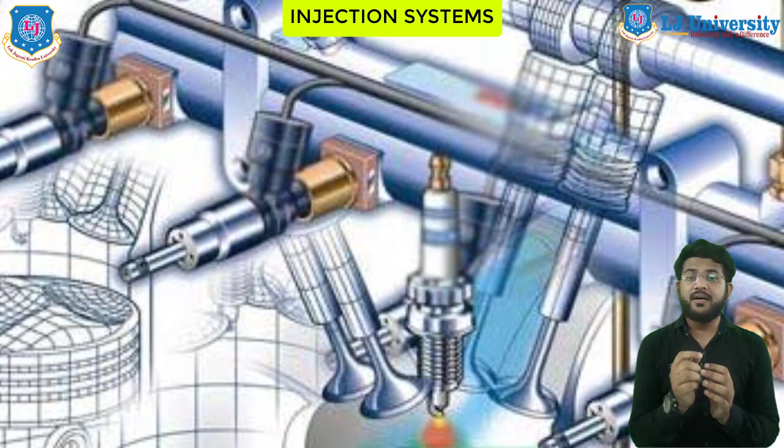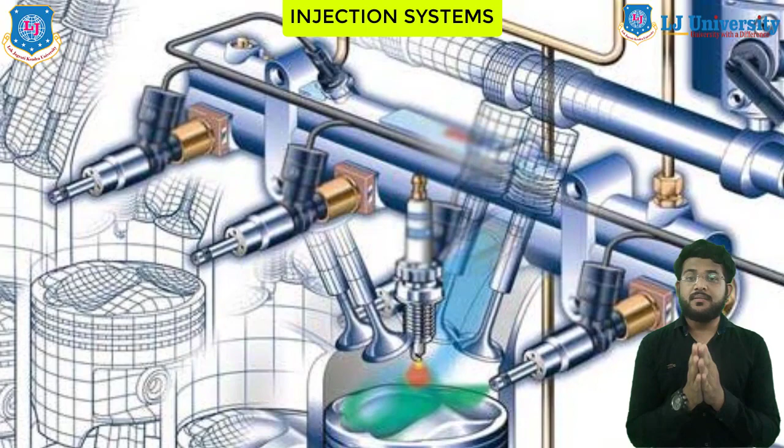The objective of the electronic fuel injection system is to regulate and optimize the fuel-air ratio entering a vehicle's engine. Fuel injection has recently become the main fuel delivery system used in automotive petrol engines. We will discuss the basic electronic fuel injection system, that is EFI, and other types of injection used in automotive in very brief.

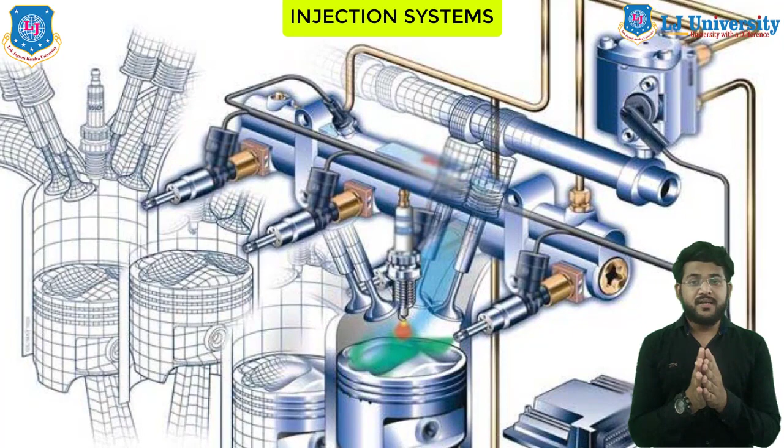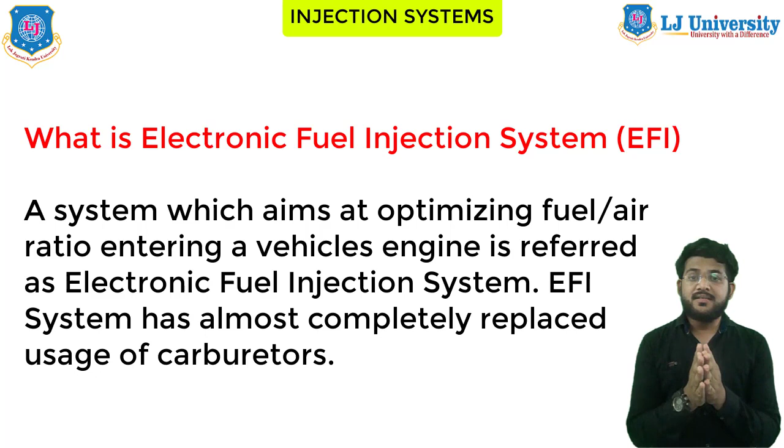First, let's start with what is electronic fuel injection system, that is EFI. A system which aims at optimizing the fuel-air ratio entering a vehicle's engine is referred to as an electronic fuel injection system. So the EFI system has almost completely replaced the usage of carburetors.

You all know how carburetors work - it has a venturi and the fuel comes from the jets. Carburetors are good for performance, but due to their vague nature, they can't make great horsepower, get solid gas mileage, and pass the emission test.

Along with the same tune, they also had many mechanical parts that could become jammed over a period of time. This means they were more maintenance intensive, with carburetor rebuild often being part of the routine maintenance schedule - you need to service it every time.

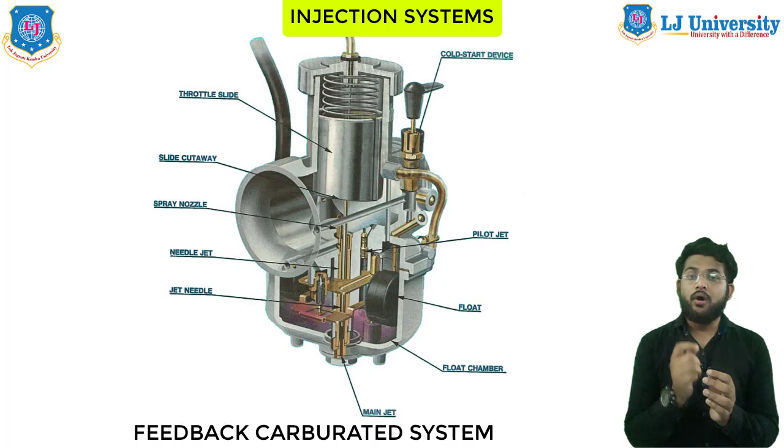So OEMs looked into EFI to solve their complex emission problems. The initial EFI was mostly just processor-controlled carburetors attached to an oxygen sensor and throttle position sensor, all wired to an electronic control unit called ECU. You all know how the ECU works.

The electronic fuel injection system consists of electronic components and sensors. It has to be kept clean and well calibrated to boost engine strength and efficiency and to cut down gas consumption, so that we can overcome the disadvantages of the carburetor.

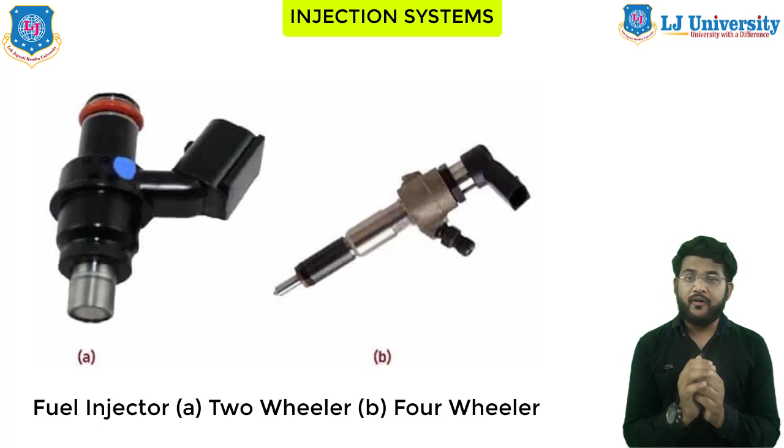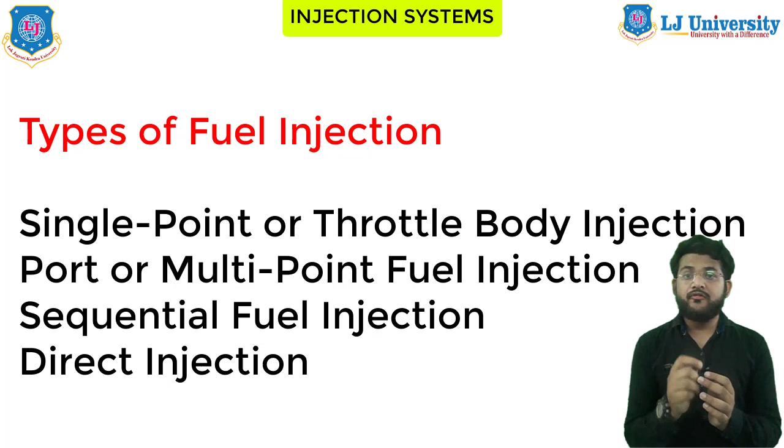To understand the concept better, we have to first understand different types of fuel injection systems. The fuel injection types used in newer or recent cars are: first, single point or throttle body injection; second, multi-port or multi-point fuel injection; third, sequential fuel injection; and fourth, direct injection. These are the main four types of injection actually used right now in cars. Let's discuss all of them one by one.

First is single point, or you can say throttle body injection. The first and simplest kind of fuel injection was the single point injection. Here the carburetor is replaced by one or two fuel injector nozzles in the throttle body, which is the throat of the engine's air intake manifold - the inlet manifold.

Single point injection was a stepping stone to the more complex multi-point system for some manufacturers. They are economical and easier to service.

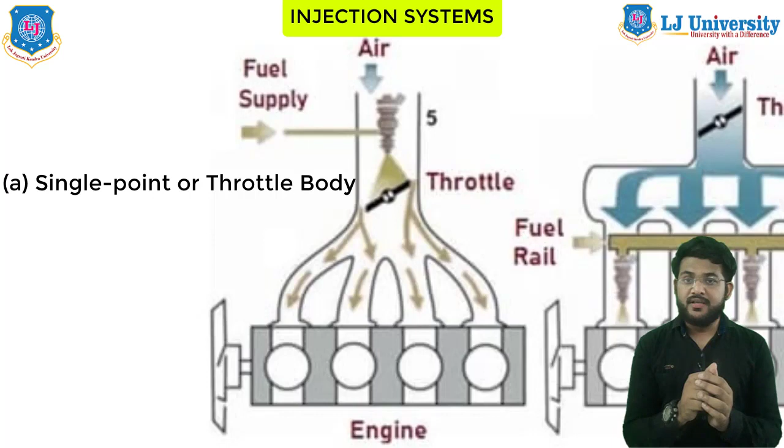Next is port injection, or multi-point fuel injection, that is MPFI. In MPFI, a separate injector nozzle is devoted to each cylinder right outside the intake port, due to which the system is also called a port injection system. When the fuel vapor is shot close to the intake port, it makes sure that the fuel is drawn completely into the cylinder.

The major benefit is that MPFI meters the fuel more precisely than the throttle body design does, so it is better at achieving the desired fuel-air ratio and improving all related aspects.

It also nearly eliminates the possibility of fuel condensing or getting collected in the intake manifold. Now, the TBI system - that is throttle body injection - and carburetors are designed in such a way that the intake manifold conducts the engine's heat, which is the measure used to vaporize the liquid fuel.

It is not necessary on engines equipped with MPFI, where the intake manifold can be made out of lighter weight material, even plastic or fiber.

So the MPFI system results in increased fuel economy due to reduced weight. Standard metal intake manifolds have to be positioned on top of the engine to conduct heat, but with MPFI it can be positioned more creatively, granting the engineers design flexibility. This makes it easier to design MPFI engines since it reduces the design constraints of the intake manifold and heat portion.

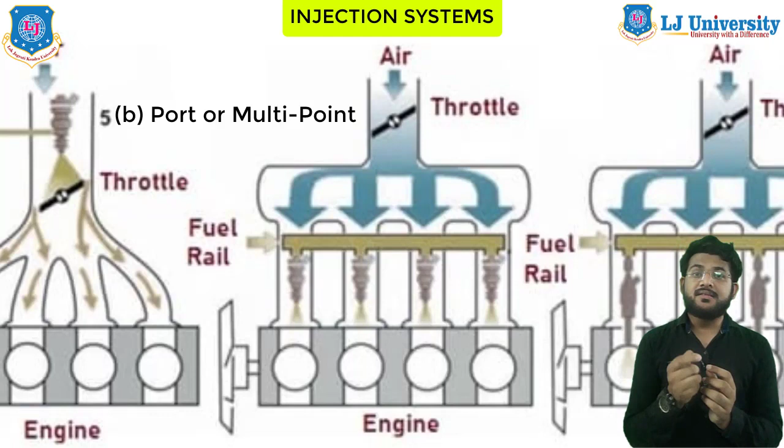Next is sequential fuel injection, also known as sequential port fuel injection (SPFI) or timed injection. It's a type of multi-port injection. Although MPFI has multiple injectors, they all spray fuel at the same time or in groups as per firing order. This may cause fuel to hang around in a port for as long as 150 milliseconds during engine idle. It may not seem like much, but it's a significant enough limitation that engineers addressed it.

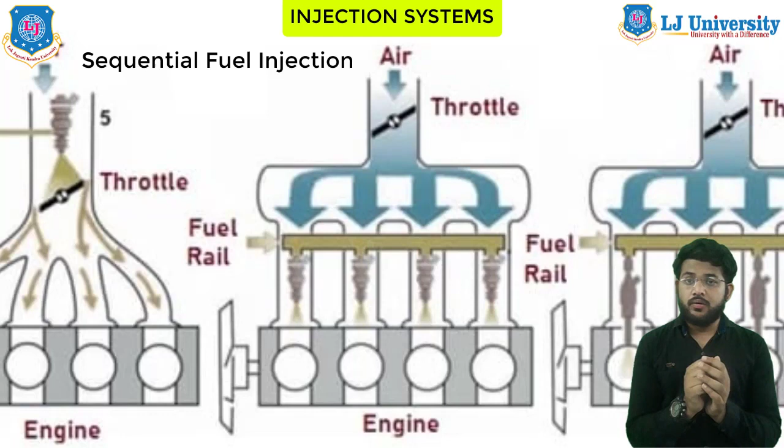Sequential fuel injection triggers every injector nozzle separately. They are timed like the spark plug and spray fuel immediately before or as their intake valve opens. Although it seems like a minor step, the efficiency and emission improvements come in exceptionally small doses. So this was all about the sequential injection system.

Next is direct injection, the last one. Direct injection injects fuel straight into the combustion chamber, past the valve. This system is common in diesel engines and is beginning to appear in gasoline engine designs also, sometimes called GDI, or gasoline direct injection system.

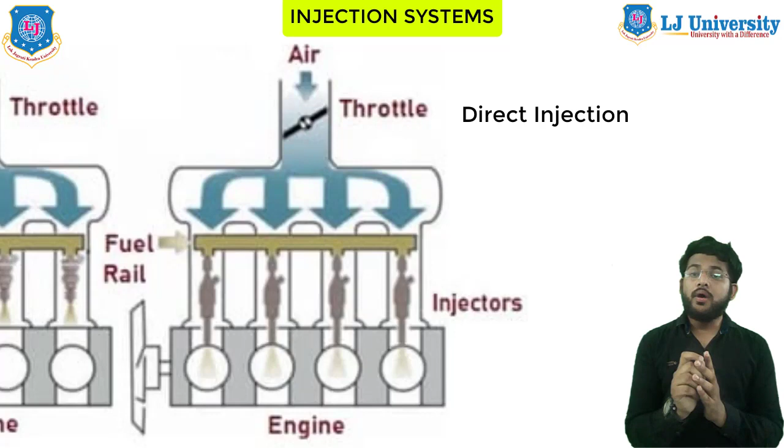Fuel proportioning is still more accurate than in other injection systems. The direct injection system grants the engineer an additional variable to precisely influence how combustion occurs in the cylinders. This discipline of engine design scrutinizes how the fuel-air mixture swirls in the cylinders and how the explosion travels from the ignition point. Direct injection can be used in low emission, lean burn engines.

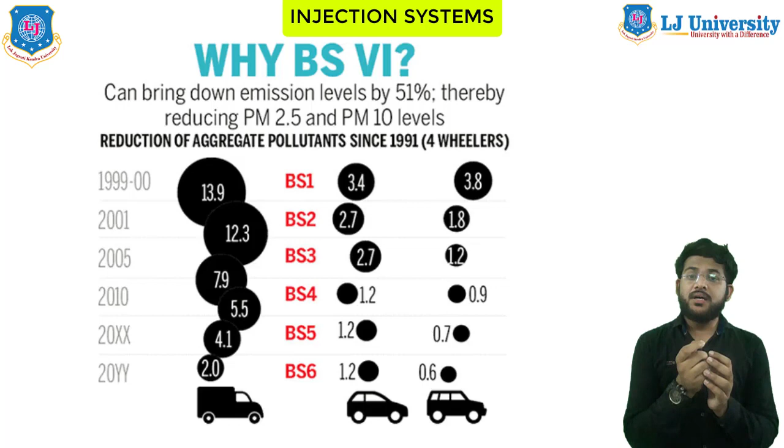So this was the basics of injection systems. You also know that right now BS6 versions are coming out. So what is there in BS6 versions? All the carburetors which were used in BS5 or BS4 versions are now replaced with EFI systems. These EFI systems are electronic fuel injection systems, now also used in two-wheelers.

So now carburetors are actually replaced by fuel injectors. What is the meaning of that? In a carburetor there was a vapor form developing inside the engine due to the mixing of the air-fuel ratio and combustion.

This vapor was actually causing pollution. The more pollution there is, the more carbon dioxide and carbon monoxide you get outside the engine. So in the exhaust system you get more pollution, but in the EFI system fuel is directly injected inside the engine. So replacing the carburetor with EFI will also reduce pollution.

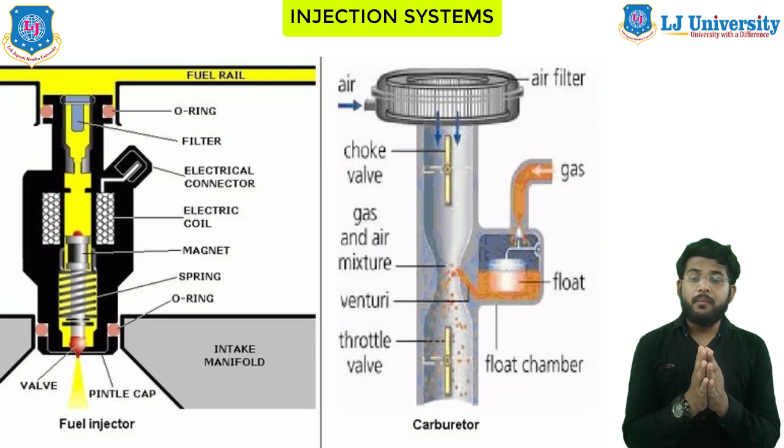So it will control pollution and reduce pollution emission norms. EFI also increases fuel economy because the injectors are operated electronically, while carburetors are operated mechanically. Mechanical systems have more resistance or friction compared to electronic injection. This is the reason fuel injection is now implemented in all vehicles and cars. So this was all about the EFI system in BS6.

So that's it in today's video. We have discussed some of the basic injection systems. I wish you got a clear idea about this. If you have anything more to know or have any specific query, please let me know, and I will surely try to respond as soon as possible.